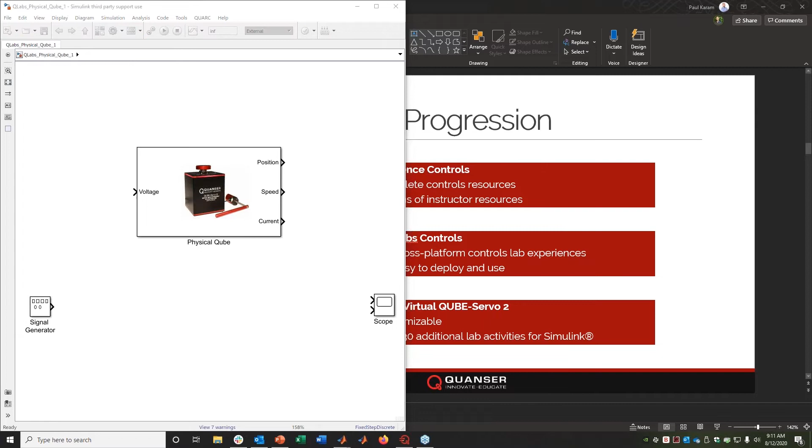It's accessible because it's a great way to highlight the fact that a DC servo motor, when you look at the voltage to speed, is a great example of a first order transfer function. Even that concept alone is quite powerful after you've described it in the lecture and brought it into the lab. So I'm just going to pause the presentation for a second, and I'm going to bring up a Simulink diagram here, and I'm going to first show you how this would work if we were sitting in front of each other and I had a physical cube there as well. So I'm turning on my webcam - hopefully, oh, there it is.

All right, so this is my physical cube that you see right on my desk here. And what I've been doing in this demo for over 15 years now has been fairly unchanged.

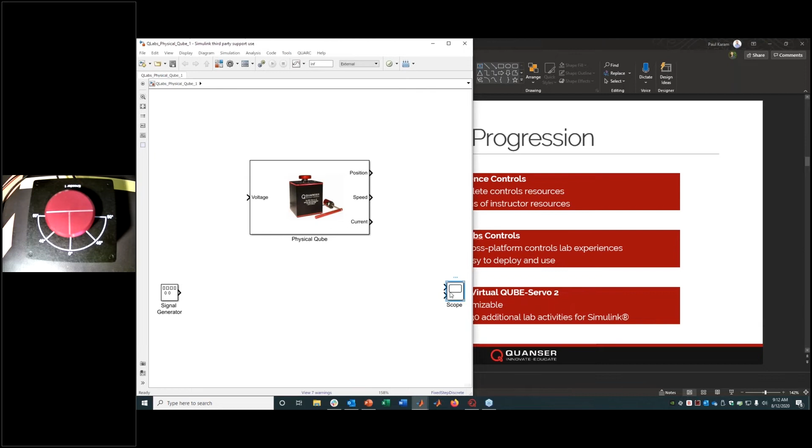Hopefully what you can get from this simple demo is really what is Quanser's typical experience. What do we expect people to do, both introductory, when a student first interacts with our solutions, all the way to research. I know this is a simple first order system when it comes to voltage to speed, and it's a fairly easy product.

But once you start adding things onto it, for example a pendulum module, this becomes more than just an education product. This is now a full-blown open architecture research product. If you're interested, you can go on our website, we have over 2,000 research papers showing different research that's happened on our products for many years. So it isn't just for education, it's a great way to get students hands-on education, but also a great way to extend that into research.

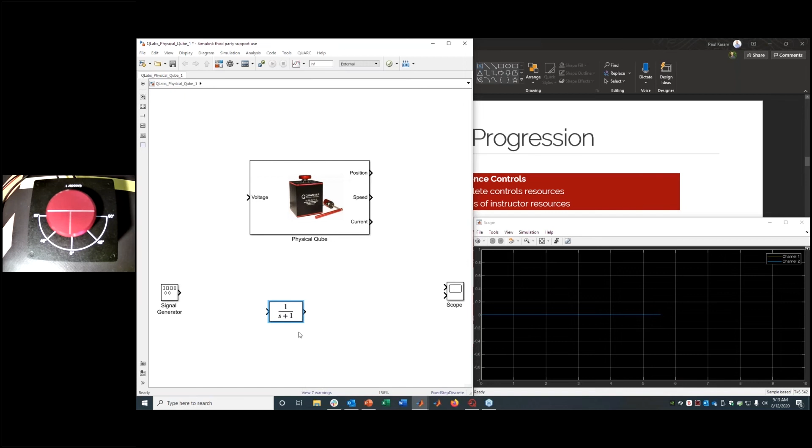So the demo that I typically do with the physical cube is I'll start with a transfer function. I think that's always a good way to start for any control system, especially for those who live and breathe control systems in your careers. It all starts with a transfer function, and I just happen to know that our transfer function of the cube is that. What I'll do is excite the physical cube and my simple model.

I'm going to save that, and select build. Our typical workflow is based on MATLAB and Simulink. It's an open architecture - I just showed you one element of that by simply wiring it up as I wanted, and that's really what we mean by open architecture. It's fully instrumented, so even the cube here has position, speed, and current measurements that come out of the device, and you drive it with a voltage.

What I just did there was generate the underlying C code behind that, using code generation from Simulink, and I'm just going to run that model right now. All right, so hopefully in your video you can see it's spinning around.

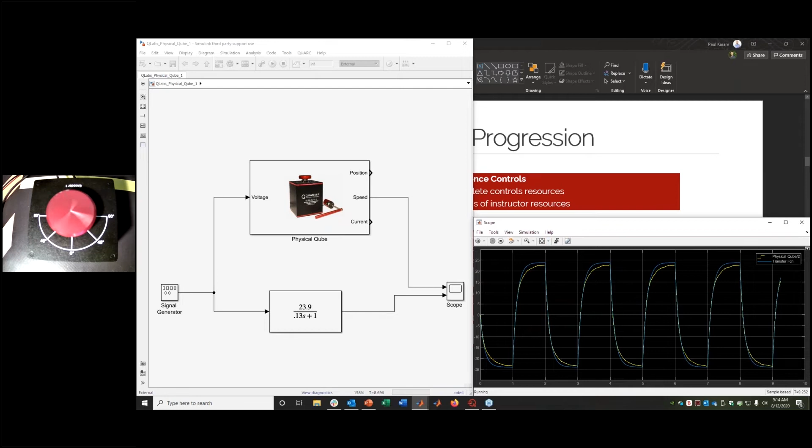My model is the blue, my transfer function is the blue, and the physical cube, if I stop it right now, is that yellow. So that yellow is the plot of my speed, and you can see this simple transfer function captures a decent portion of the dynamics, but obviously doesn't capture some other things happening inside the cube. If I go into a more linear range at a higher voltage, you can see the linear dynamics truly are dominant, and that better describes it at that voltage level.

All right, so with that I'll usually stop, and what I'll do is delete this transfer function, and then basically get going with the physical cube and show how easy it is to take this physical cube block, and then based on the inputs and outputs, design feedback control systems to do one thing or another.

But instead of doing that today, I'm actually going to open up something else. Excuse the mess on my MATLAB. I will open up basically a very similar model, but except now, instead of me talking to my physical cube that you see on my desk, I'm going to be talking to the virtual cube.

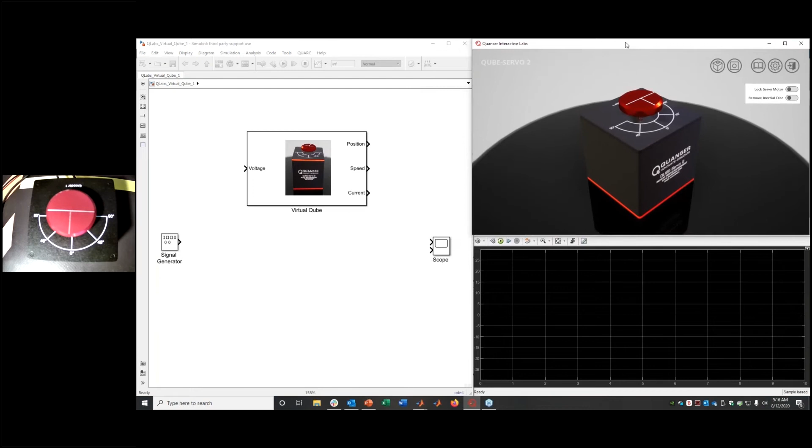And that's what we really want to talk about today - we are releasing now these virtual products, the virtual examples of our products through this Quanser Interactive Labs mechanism. For all intents and purposes, the only difference is that I've replaced the physical cube with the virtual cube. The whole experience, all the curriculum, all the MATLAB Simulink workflow stays the same. And I'll just do the very same demo that I just did.

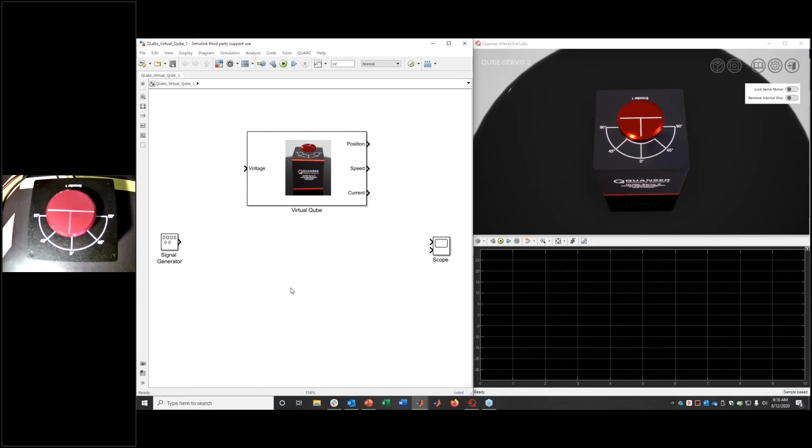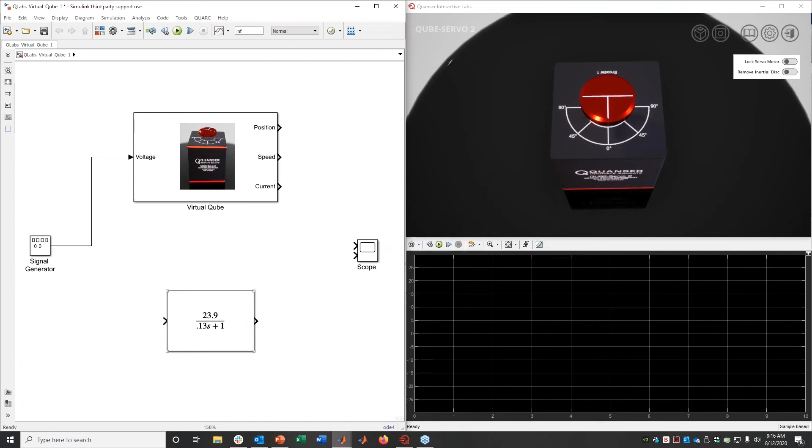So I'll drop in the transfer function again. I will turn off the webcam. All right, so going back here - this is the same demo, except now I'm simply targeting the virtual cube instead of the physical cube.

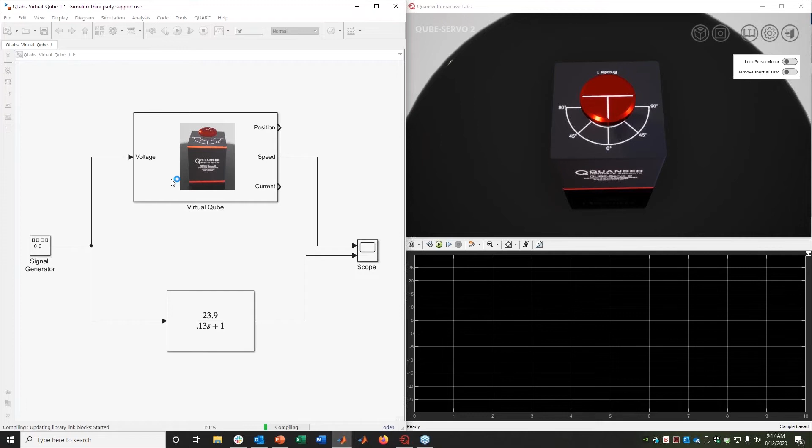We've done a really good job, and we're trying to do an even better job as we start releasing all of these assets and products, in making sure that the virtual representation of our products presents a hardware-centric approach to that model, meaning it's not just a simple transfer function. This is a nonlinear, high-fidelity, dynamic rendering of the physics and the equations of motion of every single product, not just the Qube, but all of our other products that I'm going to be showing you today.

And so we truly believe that this is a great way to still provide a hardware-centric approach. I will show you that even our low-level device driver calls call hardware access, for example, encoders. So I'm receiving a quantized signal of the encoders that would be the same type of signal that I would receive from the physical Qube.

If there's any analog devices that I'm sensing, there's a noise band that's proportional to what you see in the physical realization. We've modeled all the different components within the system down to the drive electronics and all the nonlinearities, including gravity, friction, and so on. So this is a lot more than a simple simulation. This is really capturing the true essence of the physical product and delivering it to you virtually.

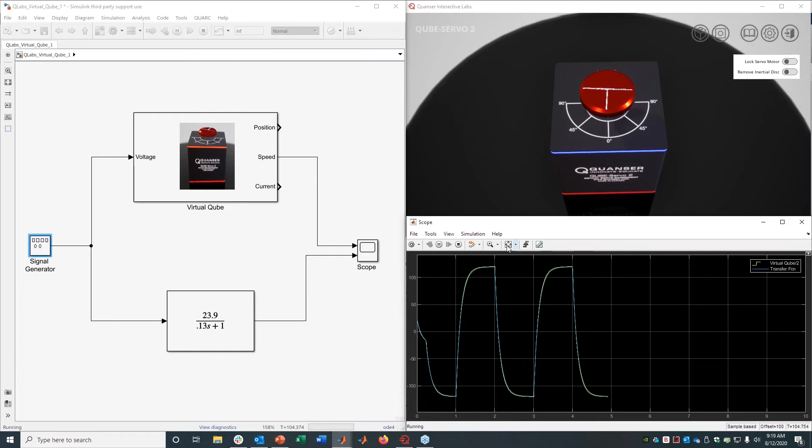And so you can see very similar to what I showed on my physical Qube. My transfer function is the same, obviously, but my virtual Qube is performing in a similar fashion to the physical Qube. It's not capturing some of the underlying nonlinear dynamics in this model. And then if I go back to a higher excitation level, then just like my physical Qube did, my virtual Qube is now performing a lot. It resembles a lot more that simple transfer function that we see over here. All right, so I'll go back to 1 volt, and I'll stop that.

So that's just a great way that I typically try to demonstrate our philosophy really at Quanser, where we want that seamless flow from the lecture. So this transfer function for me is where you as professors truly shine. You've worked really hard in explaining all the mathematics that are behind how do you take a concept like a model, a first order model or DC servo motor, and how do you derive the equations of motion that govern its dynamics and capture that via transfer function.

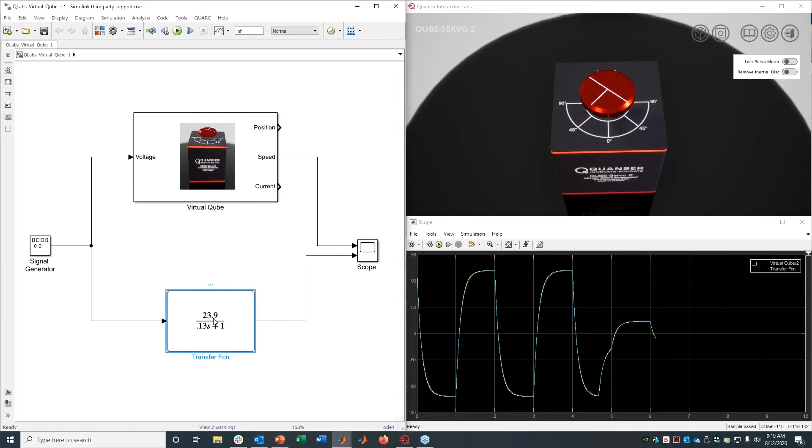And that's why I will start here to show that this is a great way to really emphasize that concept. And then once you have that, you can do a lot based on that model. There's tons of model-based design techniques that I'm sure you'll be showing to your students as well. But after that, I want to show really rapid controls prototyping, how easy we find it to use both our virtual and physical systems.

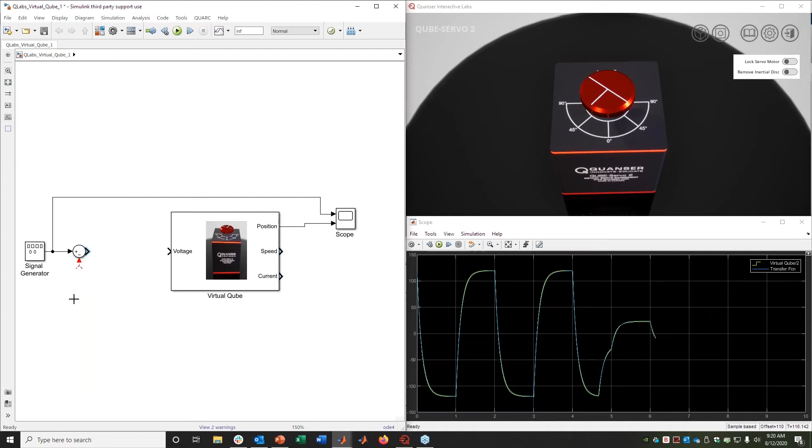So with that, let's just create a control system here. So I'm just going to zoom out a little bit, and now I want to command the position. So instead of looking at the speed, I want to command the position. So what I'm going to do is put in a summation block. And now instead of this being an excitation voltage, this will be my reference signal in radians. So I'm just going to plot that as well. And then I'm going to compare where I want it to go to where I am.

So I'm just going to hook up the position sensor there. And then simply for this first example, I'll just take that error signal and feed it directly into the voltage. Let's see what happens there.

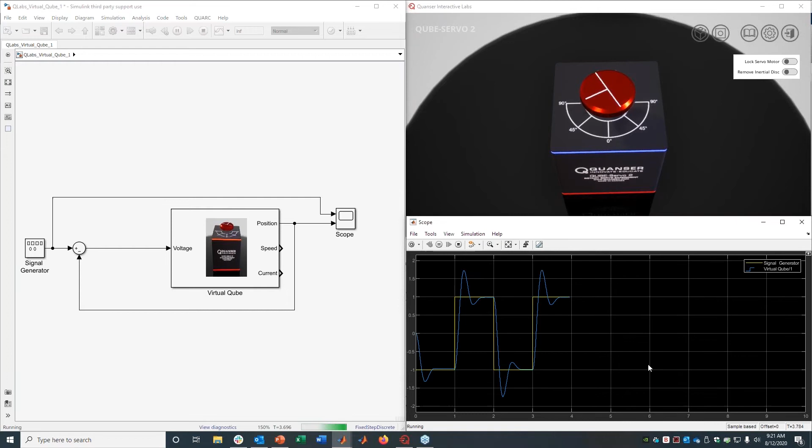While that's building, hi everyone, I just wanted to mention one side note, which is the open architecture that Paul talked about with the actual hardware. That's the same open architecture here. So as much as Paul mentioned, the virtual plant doesn't necessarily resemble the mathematics, because the real hardware, as you saw, doesn't necessarily always represent the linearized mathematical representation.

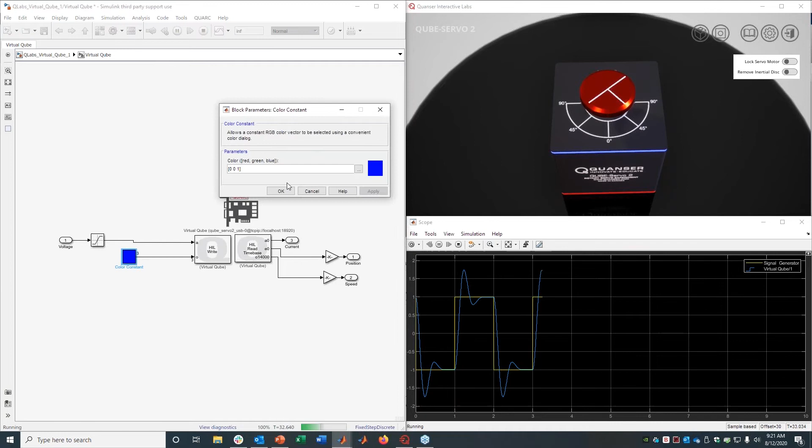If you dive under the hood of both, you can see actual encoder signals, you can see actual voltage commands with saturation, and it's basically the same open architecture on both sides as well. So it's not just a representative velocity or representative command, it's the same sensors and the same actuation with the same high fidelity models in both cases, so you can dive deep and see everything you'd like to see. Yeah, that's a really great point, Peter.

And what I'm hoping to show you here is when I go into that block, this is the exact same block that I had for my physical Qube as well. So we initialize the device and then we do a write and a read, and that's basically the same paradigm to access all our hardware. And that's the same paradigm I'm using to even access the virtual hardware.

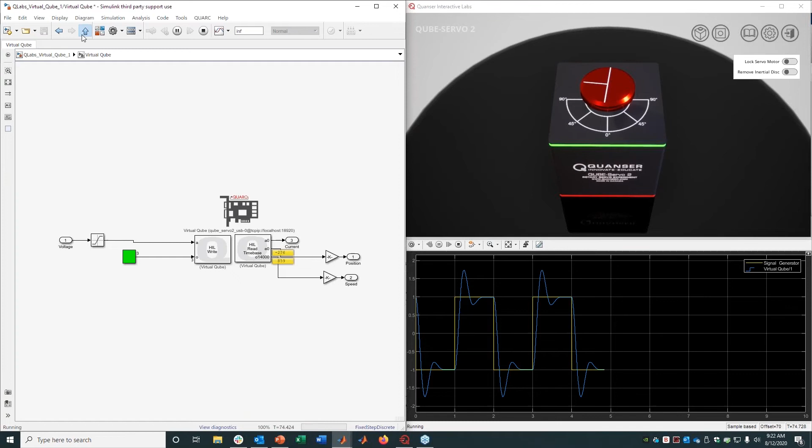So the signals coming out, this is an analog signal coming out. This is an encoder signal coming out. This is a digital speed signal coming out. So all of these are actually true to their form, in the sense that now I can take this exact same diagram and simply tell inside here in my initialized block for it to point to the virtual or the physical.

All I have to do is make one switch here, and then the model will target either the virtual or physical. So with that, you saw I did a very quick closed loop control system. This is a proportional feedback control system, and it's kind of getting there. It's got a bit of overshoot that you can see, and it's really an underdamped response, but for more all intents and purposes, it's getting to where I want to go.

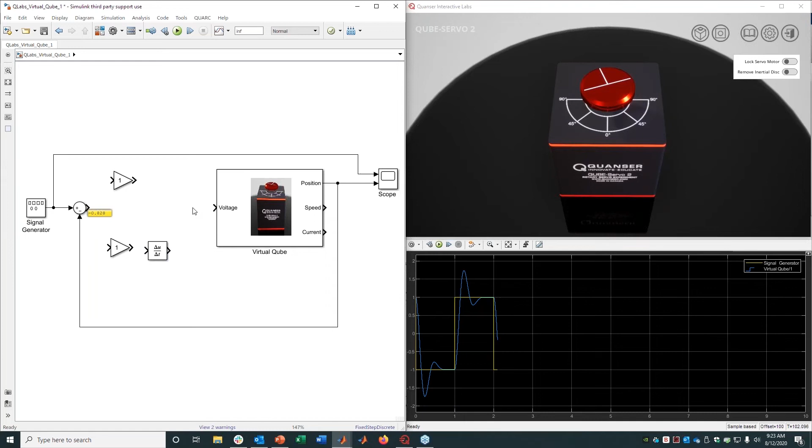Just overshooting there. So what I'll do, as I'm sure all of you know, is add the derivative term, and that should help things along. So I'm just going to add a few legs to this control system now. I will drop in a derivative term, then I will sum it up.

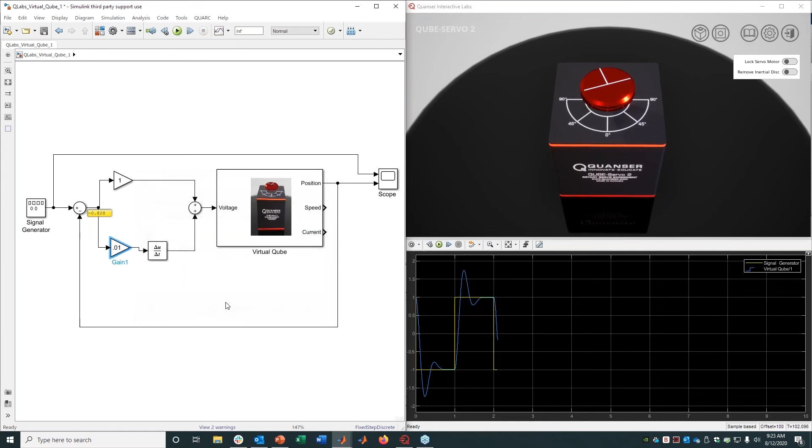All right, so here's my proportional leg summed up. Here is my derivative leg summed up. And this is probably a bit too high. I'll run this again.

Hopefully what you're seeing with this is just how easy it is to really implement any algorithm you want. This is a very simple PD controller that I've implemented here, but because we're using the full-blown MATLAB and Simulink workflow, the sophisticated engineering workflow, anything that's available in Simulink is truly available to you to implement on both the virtual and physical offerings from Quanser.

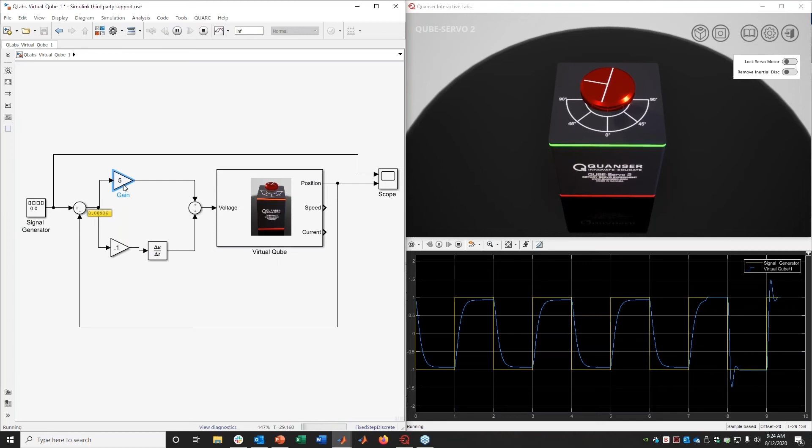So you can see right now I've done PD, and it's getting better. The overshoot's definitely gone, but it's a little sluggish in its performance. So I'm just going to up my proportional gain there. I've reintroduced that overshoot, and I'll up my derivative slightly, so I still get that responsiveness while really truly reducing that overshoot. So I'd say this is a pretty good control system, and it only took me a few minutes.

To go from validating the model of my system, and then I basically used that model to help me derive these, or get to these gains that best are deployed to get this type of response on my controller.

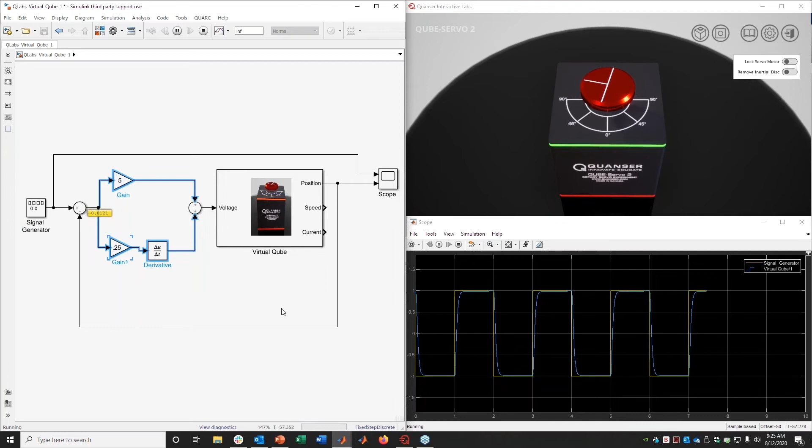So hopefully a big takeaway there is that we've done our utmost to make sure that the virtual experience resembles the physical experience for all intents and purposes, all the way down to the device driver calls that happen at the lowest level interface.

And then, over and above that, that workflow, that open architecture, sophisticated engineering workflow of leveraging MATLAB and Simulink, everything being instrumented, everything being visible to you on the screen, still is near and dear to Quanser, and it's still relevant and a big part of what we provide, a big part of the student experience when you use even our virtual products as well.

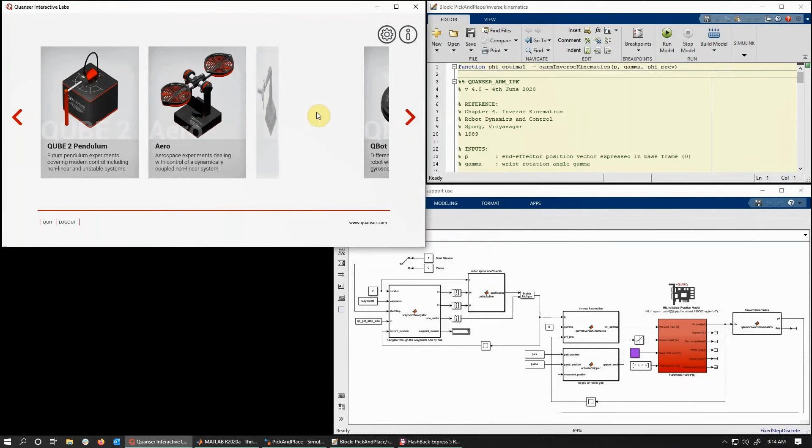But what I'm going to show you here is an example of, to a certain extent, the flip side of what Paul showed you, which is, here what I'm doing is opening up another one of our virtual products. This is the Quanser ARM, or the Q ARM. And in this case, I'm running the off-the-shelf controllers we would typically use with the Q ARM.

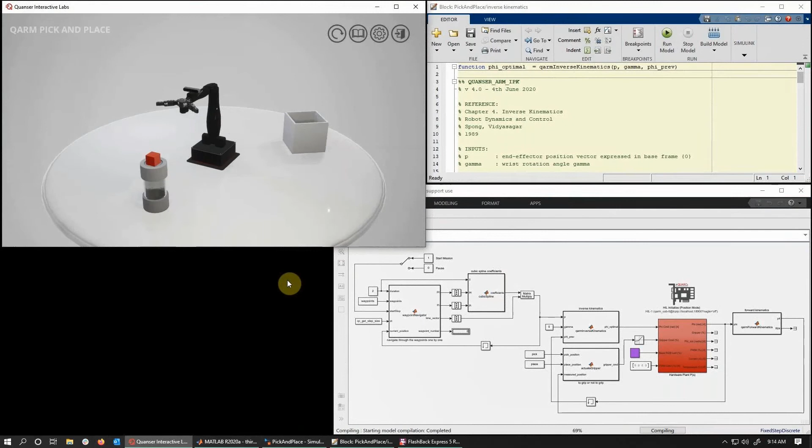What I wanted to talk about with this demonstration is that for 30 years, we've been building up our collection of curriculum, courseware, teaching materials, example models, all sorts of resources to use our hardware products in controls and academic environments, whether for research or teaching. All of that material is available off the shelf to use with these virtual products. As Paul alluded to with the changes to this block, very minimal changes need to be made to existing Simulink models to have them work with the virtual hardware instead of the physical hardware.

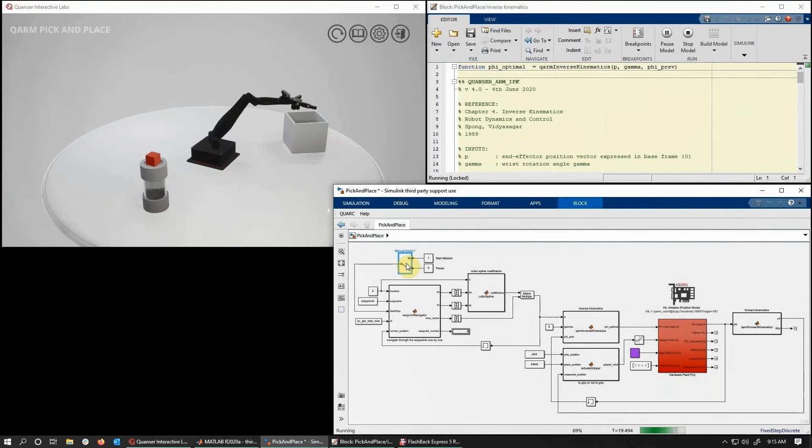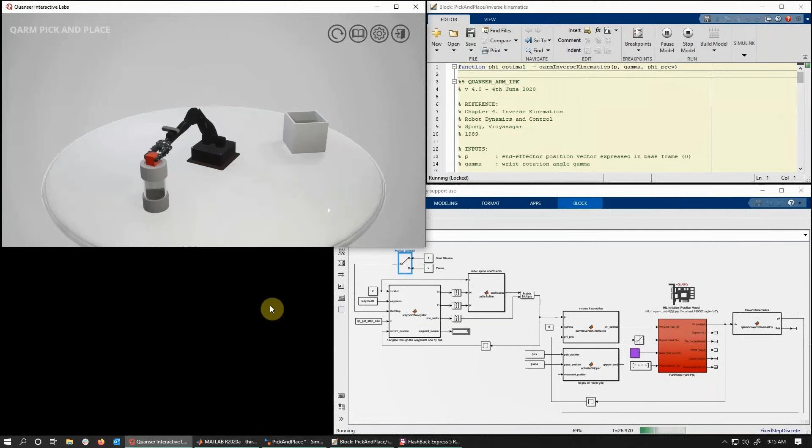This is an example of an off-the-shelf model for teaching robotics: over 40 Simulink models we just released a few months ago for our QUBE-Servo 2 platform, covering everything from the very basics of control systems through advanced applications, stability, digital control, and even some examples of nonlinear control. All of those can be run on the virtual products with very minimal changes necessary.

That really opens up a wealth of material that can complement these platforms. In terms of the virtual lab experiences themselves, these virtual products we're showing you today are instrumented, dynamically accurate, measured and controlled using MATLAB Simulink, the same as our other physical systems would be, and hopefully later this year, other development environments as we work to complement the examples and material we have available.

They can be used to enrich your lectures, but also your activities in traditional labs. We really believe that post-COVID, with work from home and learn from home, these products will still offer a hugely valuable experience for students to work with these systems, to interact with their own versions of physical hardware at home, in their dorm rooms, or in university labs, to really experiment and address some of the challenges of delivering physical labs, like large class sizes, limited lab space, scheduling, and students who have to journey long distances to get to and from universities.

All of those challenges can be eased by having these virtual plants available. They're compatible with standard curriculum resources, and the system you use to manage access to these platforms, to add your students and give them access, is very straightforward. It's all managed using a cloud management system that's very intuitive to give them that experience.

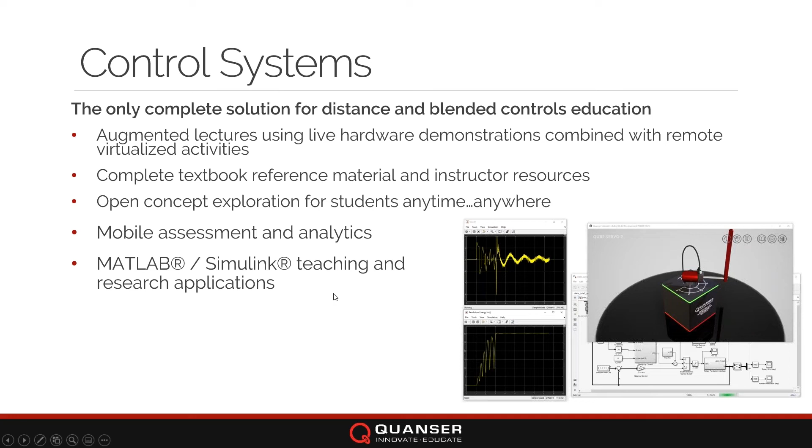So really, as I said, just to sum up, these experiments are a complete solution. They can be applied to introductory and advanced control systems courses, aerospace courses, manipulator robotics, and it's the same Quanser physical hardware experience that you've been using and your students have been using for over 30 years, but now virtualized. Now every student has the ability to have a robot, to have a servo, and to work with it and really understand how control systems comes to life when applied to these hardware and physical systems.

So what I'm going to do now is slightly abruptly change pace, and show you a bit of the experience for instructors, managing access to the system. This is one of the things that's new, that a lot of you would not be familiar with if you'd used Quanser hardware before, because obviously our physical systems aren't managed using a cloud platform. But we've spent the last 6 or 7 years building a large foundation of software support on the cloud, and also through our mobile platforms, to deliver content seamlessly to students and instructors.

And we've leveraged that legacy and foundation to deliver this product seamlessly and very easily. So I'll flip to my browser here and quickly show you what that experience is like. Behind the scenes, what I would have done as an administrator is create what we call an academic session - a scheduled time where you and your students would have access to the platform. That would be part of the subscription you would have purchased for this platform, which my colleague Vivashan will talk about a little bit later. You would have received an email detailing the steps needed to activate and use your subscription.

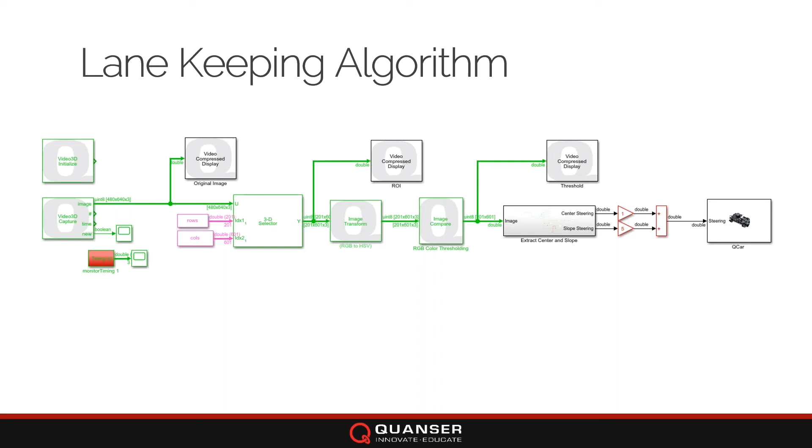So for example, like all of us are finding new ways to work, this is what I've been working on as well. I don't just provide webinars, I'm actually one of the developers in the company. I'm working on a lane keeping algorithm for our new research platform, the self-driving car research studio. A very simple algorithm that I've been tweaking for some time, and this is it performed on my setup. Excuse the mess in my basement, but that's the space I work with now.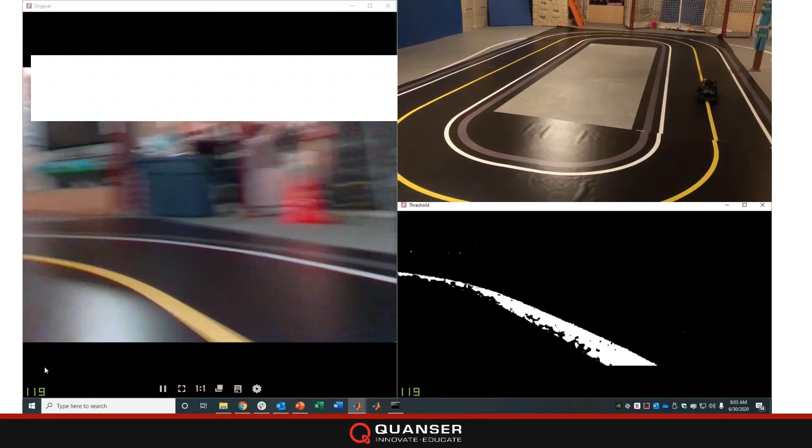This is the car trying its best, and probably not doing as good a job as it could, to stay on the yellow line while looking ahead. I'm trying to push its speed here, trying to predict curvatures in my lanes or path ahead of me, and trying to compensate for that beforehand. So that's really the algorithm that I've developed.

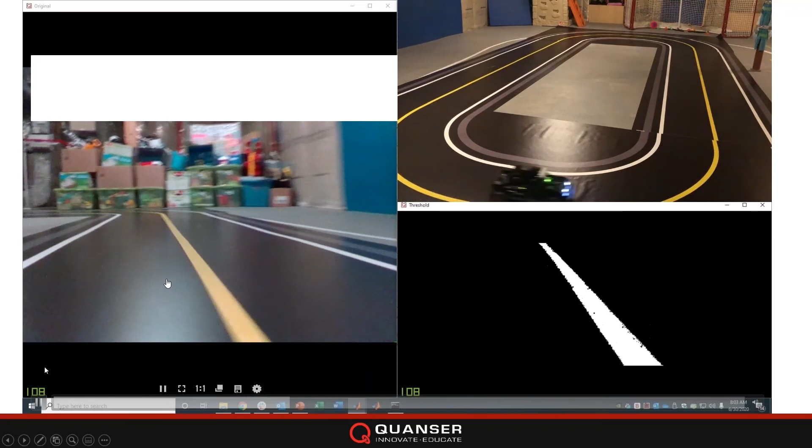But what I wanted to show you here is one of the assets we've released right now, our virtual QBot. The QBot is a great entry into mobile robotics, with a great curriculum complement that you can deploy on it. What you're seeing here is that exact same algorithm I had developed and deployed on the physical Q car. I've taken that exact same algorithm and deployed it on the virtual QBot.

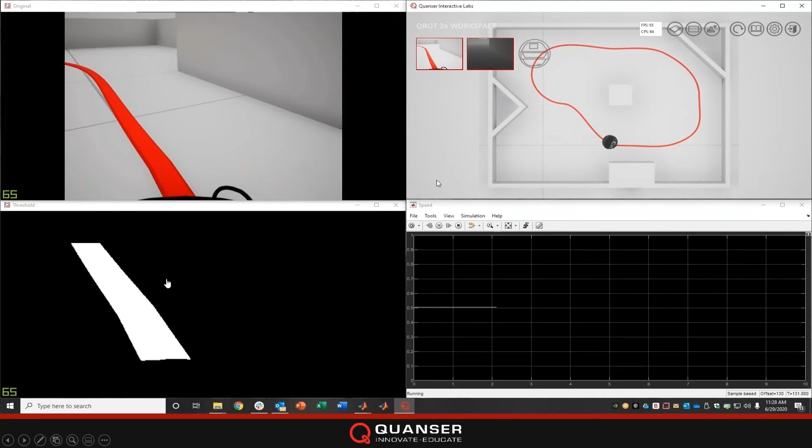What I want you to take away from this is how seamless it is to go from the virtual to the physical and back, and having that rhythm and that iteration, we truly believe is quite powerful, not just for teaching but for research.

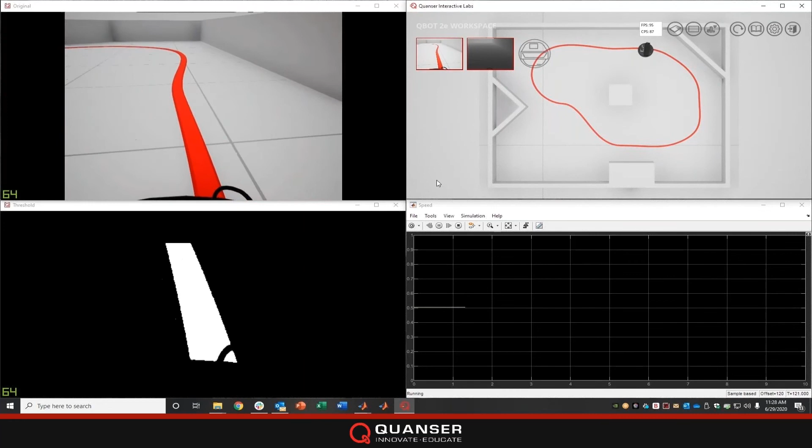If you fast forward into the future, regardless of once everyone comes back into the physical lab, there's still limitations. You still have to have access to the lab, share the equipment with colleagues and so on. Whereas with this virtual approach, there is no limitation on access. It's truly scalable, fully rendered and active on your own desktop, on the student's or researcher's desktop at home, wherever they happen to be.

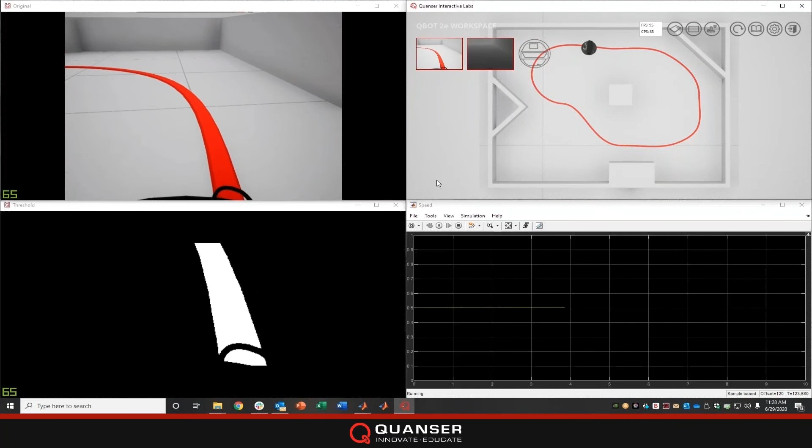So you have a lot more access. It's a lot more accessible than the physical product ever was, because you have to share it and be at that location with it as well. So there's a lot of advantages to having these two together. Like Peter said, our philosophy is a hands-on approach to engineering education and research.

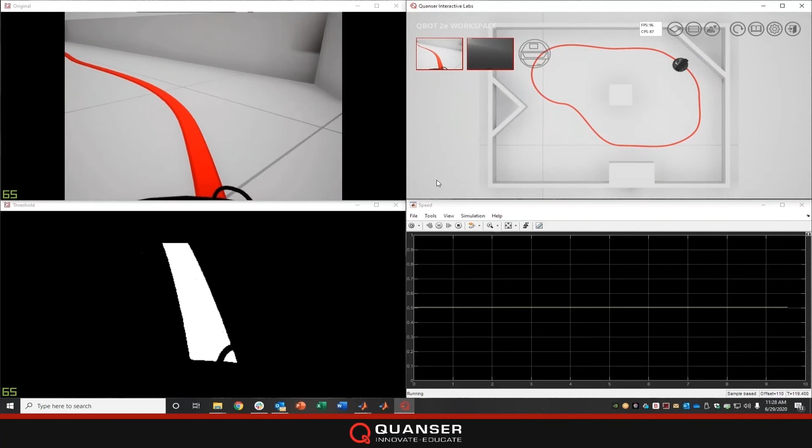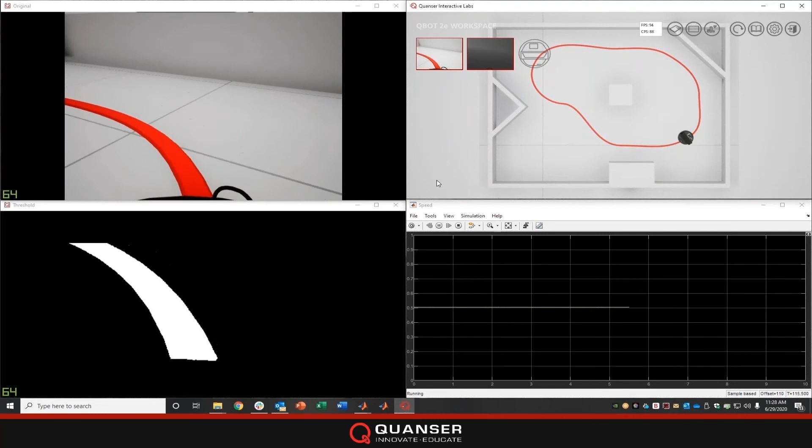We will always believe that engineering is an applied science, and you need to have access to physical devices as part of that education and research. But this is a modern and sophisticated workflow. When students graduate and go into industry, this is part of that workflow. You want to understand the system, develop and deploy algorithms on simulations, and this is really just a much higher fidelity virtualization, an extension of a simulation before you go back to the physical. Having the ability to go back and forth, because we're using the same blocks and the same interfaces, we truly believe will lend itself to that workflow as well.

I want to introduce to all of you my colleague Thuvashan. Thuvashan has been with Quanser for a few years now, and is taking on a new role as the global specialist when it comes to all of our virtual offerings. I'll pass the mic and the screen over to Thuvashan.

Thanks, Paul. I'd like to take you guys through and give you a bit of insight in terms of what's available now. One moment.

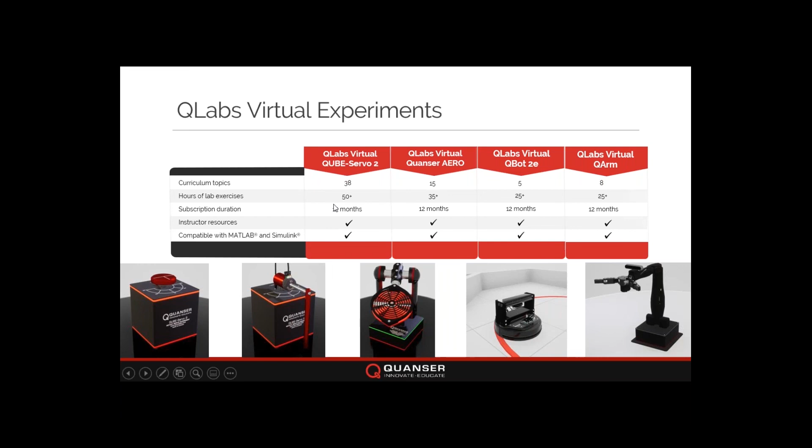For example, if you're looking at utilizing the QUBE-Servo, as well as the QBot 2e and the QArm, as just an example. We are a feedback company, and we constantly get the pulse of what our customers need, and they tell us exactly what they're using our solutions for and what they envision their future of teaching and research to be.

These platforms are specifically designed for bring-your-own-device use, meaning students have access to MATLAB Simulink on their PC, or a research professor could have their own software personally on their own laptop at home or even in the lab. But primarily, there are two underlying principles that need to be there from a system and requirement standpoint.

The individual needs to have Windows 10 64-bit or better, as well as MATLAB Simulink 2019A or later. The underlying principle there is because we are using an Unreal physics engine, which is effectively a 3D gaming engine, it really requires a decent capable processor and graphics card that's able to support these applications.

But when you're going through these immersive, high-fidelity, engaging, interactive virtual experiences, it truly is intuitive and a wonder to work with. With that being said, we are envisioning a future where there is an entire product suite of Quanser solutions that have been virtualized for use and exploration.

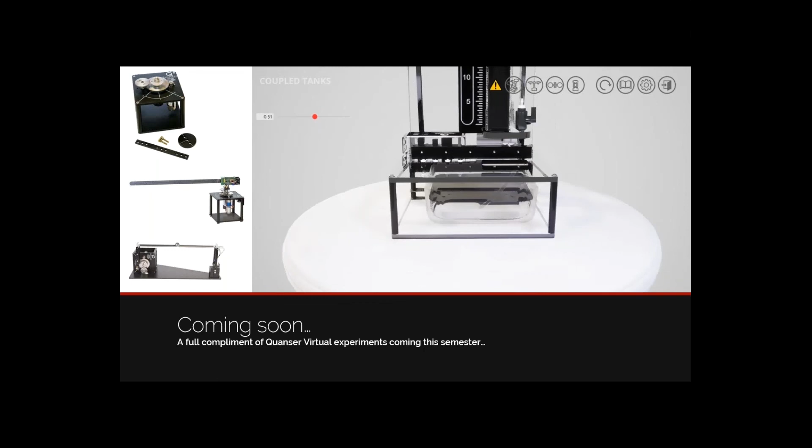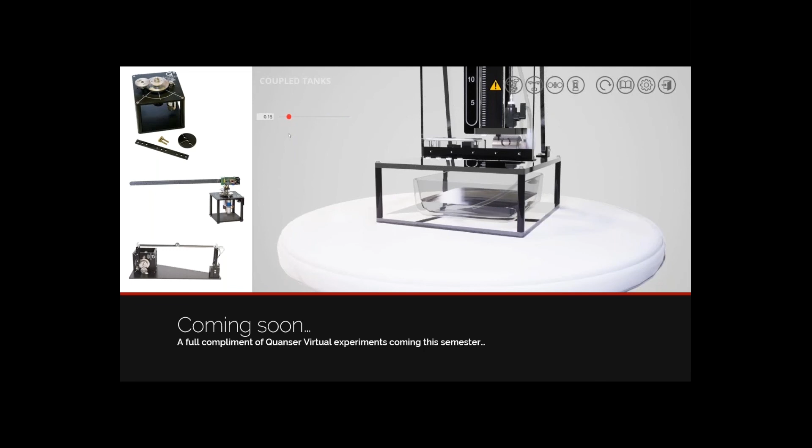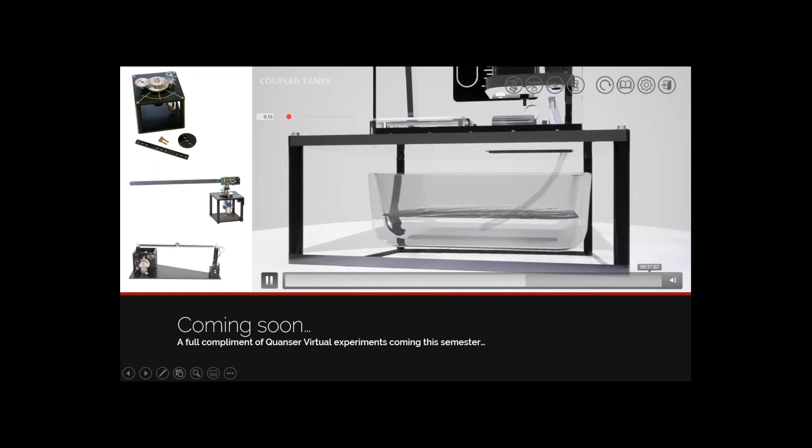We're excited to announce that four more solutions are coming down the pipeline. We're expecting these to come this semester. These will be based on our rotary servo solution, the SRV02 rotary base unit, with add-on modules of the FlexLink, the ball and beam system for classical controls, and the coupled tanks. So please keep an eye out.

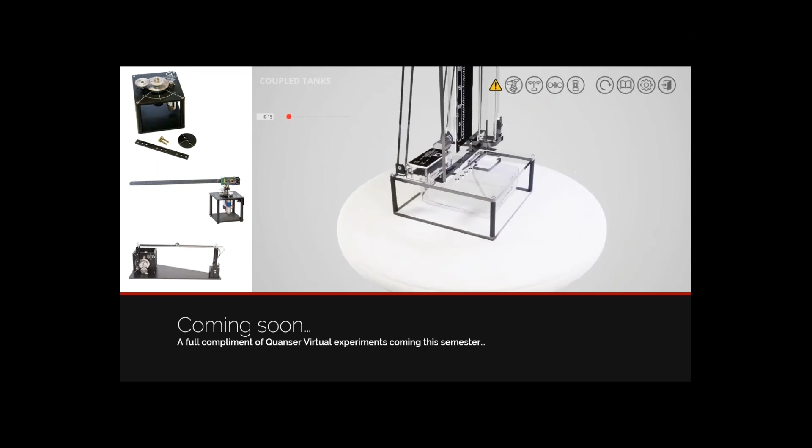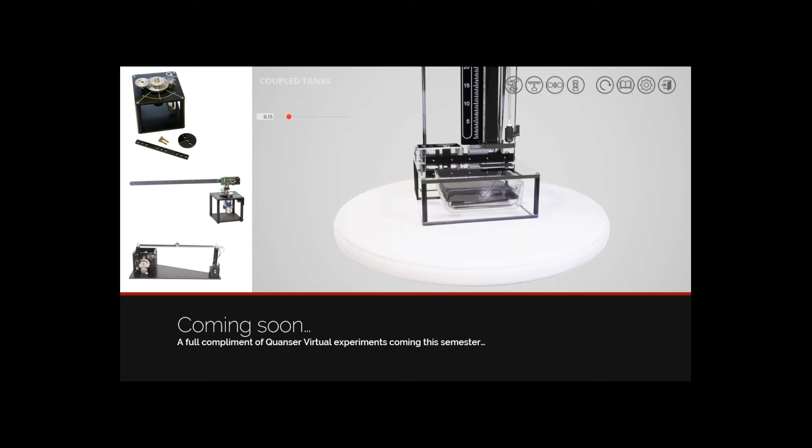If you have any feedback or thoughts, please get in touch with our team, and we'd love to work with you to better support. We envision a future where there is a direct one-to-one experience when utilizing either our physical solutions or our virtual, creating a more accessible world where you're able to enhance your teaching and research efforts.